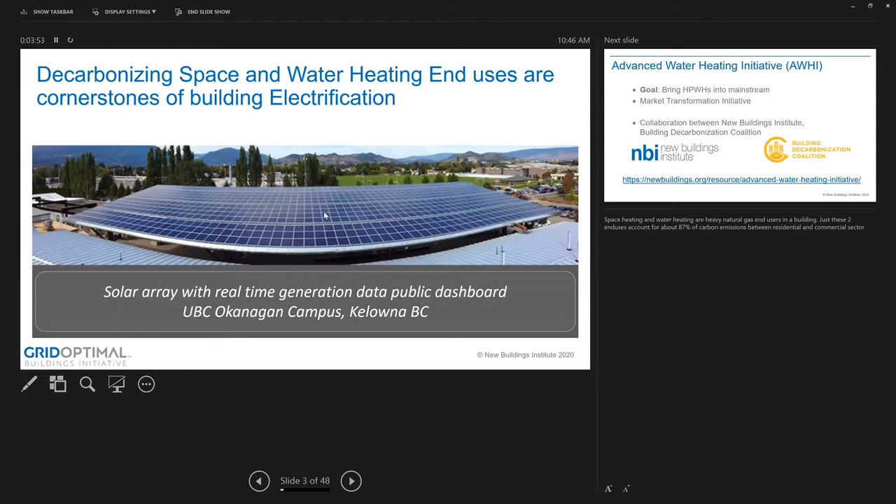Next slide, please. So typically, when you hear about decarbonization or electrification, people talk about grid side electrification and decarbonization, but space heating and water heating are heavy users of natural gas in a building. These two end uses account for 87% of carbon emissions between the residential and commercial sector, so there needs to be special attention given to these two end uses.

Next slide, please. Through the Advanced Water Heating Initiative, we are focusing on the water heating side of things. It's a regional multi-stakeholder effort to help increase production as well as adoption of heat pump water heaters. It's a collaborative market transformation effort between New Buildings Institute and Building Decarbonization Coalition.

So why heat pump water heaters, why so much focus on them? Heat pump water heaters are proven technology and have been in the market for more than decades now. Compared to conventional gas water heaters, they are 2 to 4 times more efficient, and because of that they also reduce greenhouse gas emissions as well as methane emissions. A grid connected smart water heater has great ability to reduce demand when connected to the grid, and act as thermal batteries. That's why there is this focus on heat pump water heaters under the Advanced Water Heating Initiative.

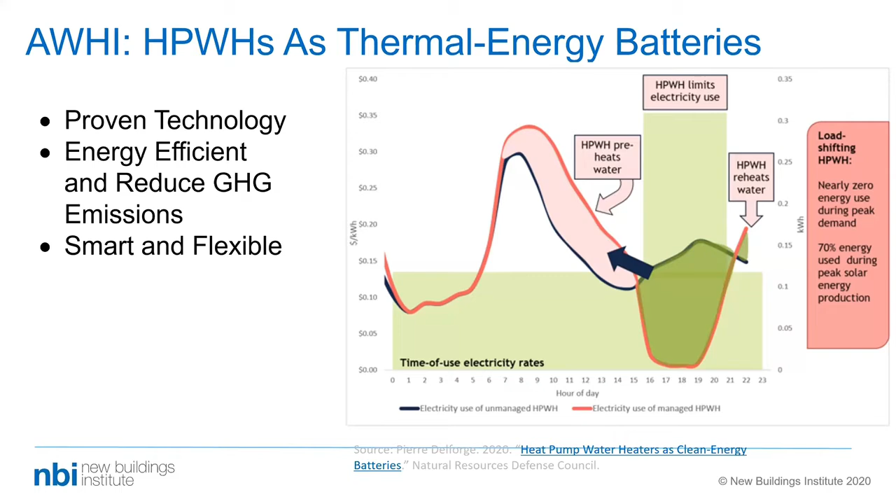Next slide, please. The funders and partners of the initiative are Bonneville Power Administration, Southern California Edison, Northwest Energy Efficiency Alliance, and SMUD.

Next. So right now in California, 93% of California's water heating stock, and 50% of Northwest water heating stock, is directly pumping fossil fuel into buildings for heating water. To give you some context, that is equivalent to 14 million water heaters in California, and millions of water heaters nationally. So this technology alone has tremendous opportunity to reduce carbon emissions.

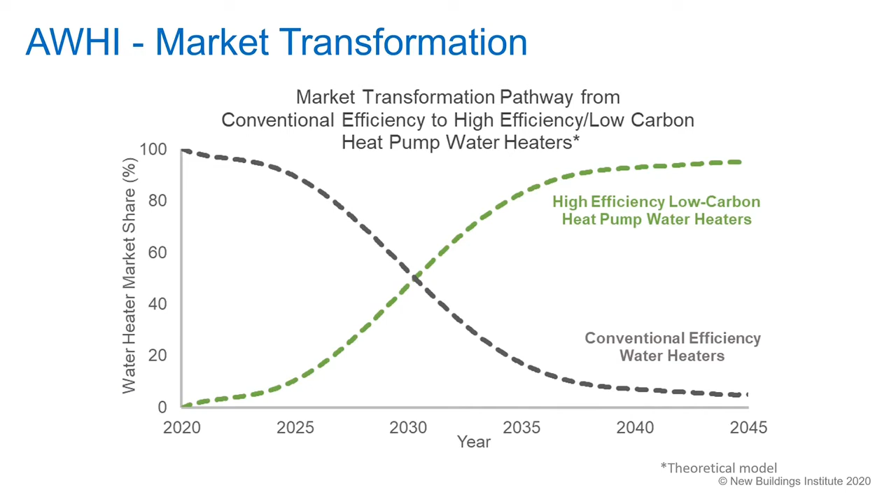So, role of the initiative. There are many efforts happening under this initiative, but I like to bin them under these three main categories: strategic planning and coordination.

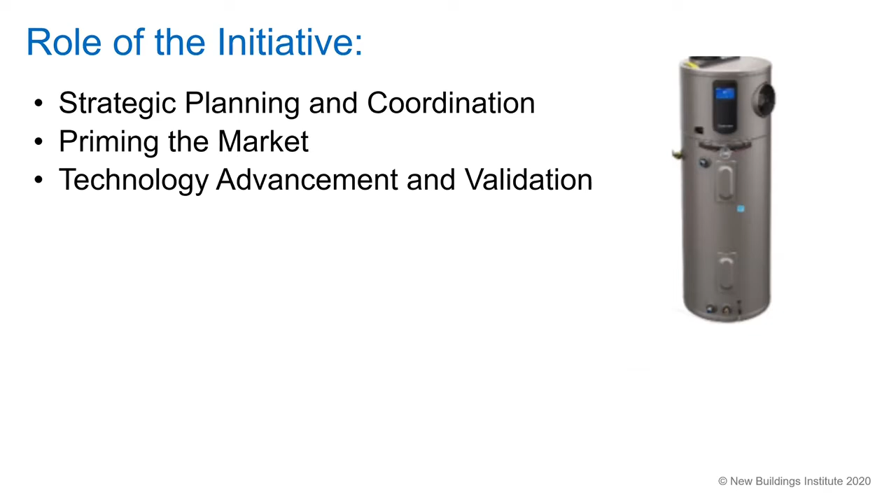Priming the market covers anything to do with market demand and confidence building activities. Technology advancement and validation means making sure the technology is advancing and available, and that supporting materials are available, like trade community resources, guidelines and checklists, and permitting guidelines. So the third bullet covers anything to do with technology advancement and validation.

So we have 4 different working groups under the initiative, along with the initiative leadership, which is focusing on planning and strategy, and we have a 13-member steering committee.

For the working groups under unitary heat pump water heaters, think of these working groups as focusing on technologies as well as market sector. This initiative is for residential as well as commercial buildings, and new construction as well as retrofits.

Under unitary, there is the 240 volt working group, led by Owen from SMUD and Jareen from Southern California Edison. Each working group, since the technology is in different phases of adoption, has unique challenges. For example, for 240 volt, the product exists in the market, and this working group is focusing on developing building demand, program and utility incentive guidelines and recommendations, and regulatory recommendations.

The next one is 120 volt, led by Jim Lutz from Hot Water Research. The product is not market ready right now. I know Craig is presenting from GE—GE has a 120 volt product currently under UL testing. Since the product is not market ready, this working group is focusing more on technology development, guidelines development, and building market demand.

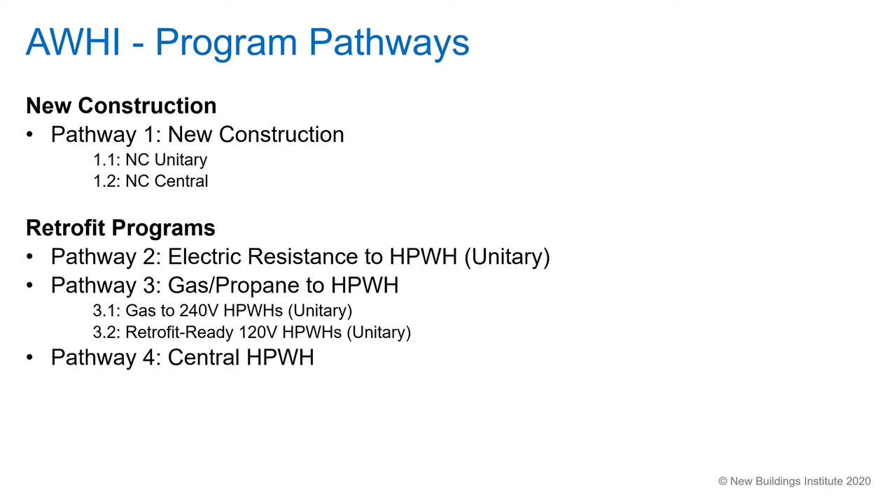Next. So key updates: this Advanced Water Heating Initiative is a collaborative effort of over 35 organizations and 50 plus active members. The key stakeholders are manufacturers, efficiency advocates, utilities, and cities.

Great news is JA13 is adopted. It's a heat pump water heater demand management standard that requires time-of-use based load shifting for non-connected units, and grid-connected load shifting.

There is great potential for this initiative to become a national initiative. We have received interest from the state of Colorado and the Midwest, and we are in fact starting a similar effort in the Midwest.

Last year there were many downstream programs—18 plus heat pump water heater focused programs in California and 80 plus programs in the Northwest—and none of them were seeing much uptake. They were all downstream programs focusing on customers. Now we see a switch from downstream to midstream programs, focusing on distributors and contractors, and with that switch we are slowly starting to see an uptake.

Just to give an example, Southern California Edison just came up with their retailer incentive program. Now they have units available for $199 at retailers like Lowe's, and most of the units were sold within 1 week. I think that's great progress.

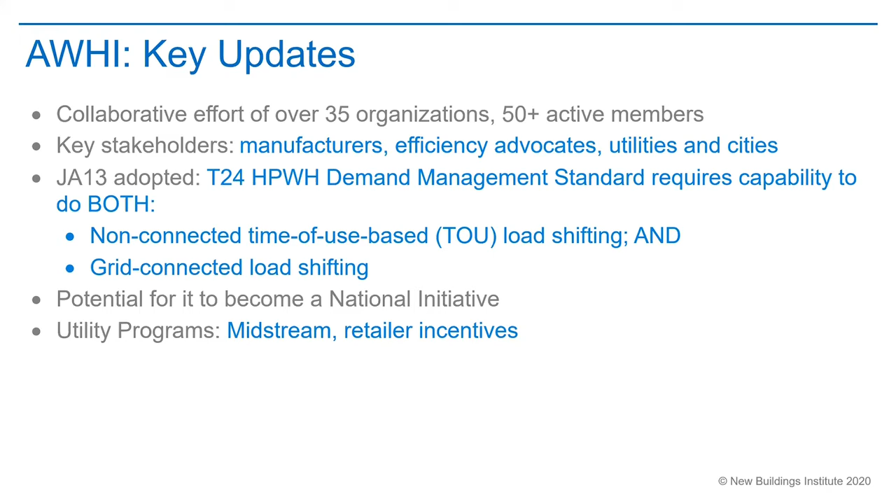Quickly on the logic model—I do not plan to go through it in detail. Basically, the logic model focuses on the barriers for technology adoption and then channels them between three main channels: market channel, programs and partnerships, and regulatory. Then there are activities and outputs to make sure to tackle the barriers. Next slide, please.

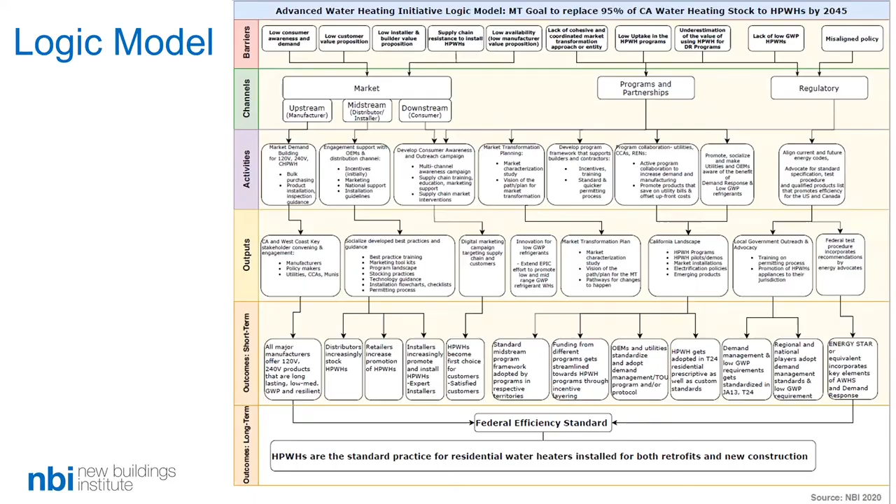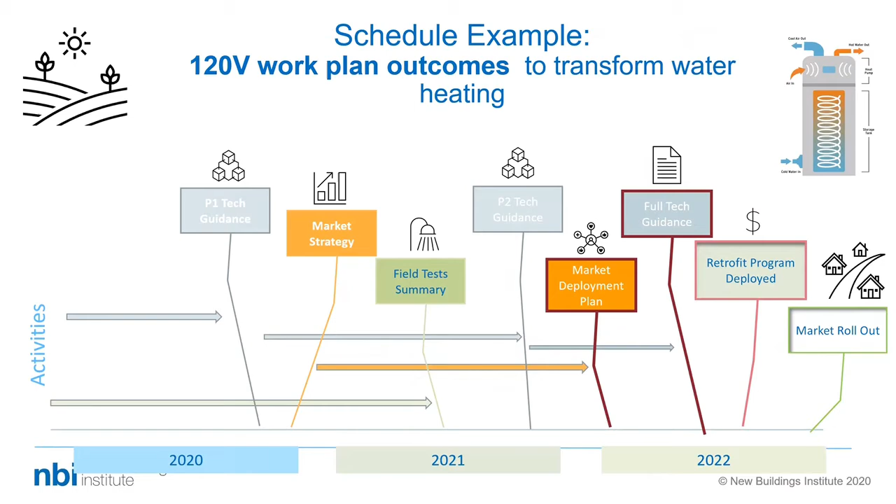For this market transformation effort to be successful, we need to know clearly what the energy, emissions, and operating cost savings are by this technology compared to its competitors like electric resistance, standard gas tank, condensing tankless, and non-condensing tankless. This is just a draft—we are starting to look into the energy and emissions.

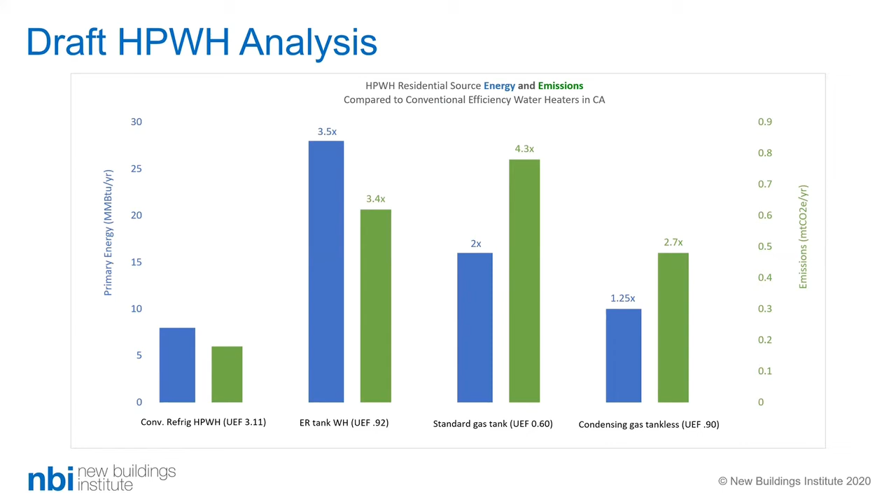One feedback I received from the steering committee was to do this over a range. So I'm working on high versus low variables, and next time we'll have a range for these.

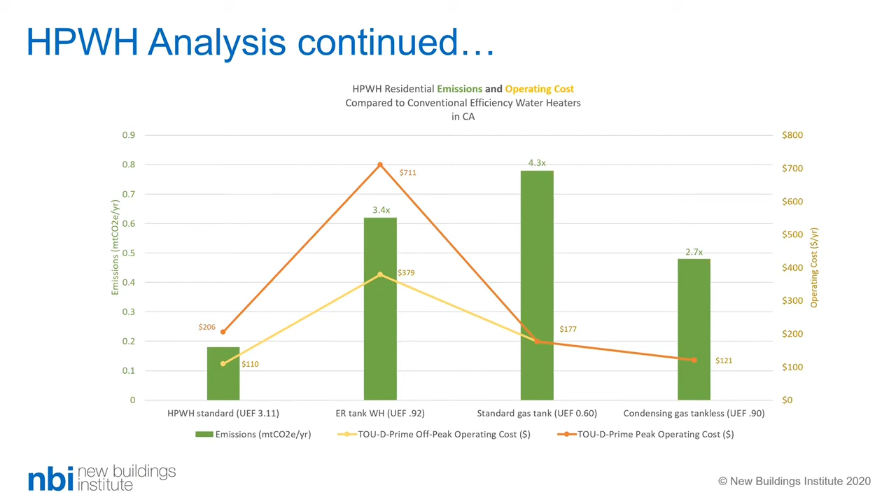We have an advanced water heating webpage, and the link is given below. There's also a blog out by Cathy Higgins, our research director, and me—feel free to read that, the link is below. So that's about the Advanced Water Heating Initiative.

The key takeaways are: heat pump water heaters are a proven technology and ready for market adoption, and there needs to be more emphasis given to market adoption and technology advancement with grid connectivity and advanced controls. Thank you.

This is Cathy—I see a few questions. Maybe it would be great to have them narrated by Amanda now, so they're right in line with Amrita's presentation. It's a long time till the next one.

There's a question here: Does the Rheem 120 volt heat pump water heater not meet the standards that Amrita was talking about? If not, why not?

Rheem isn't specifically talking about their 120 volt water heaters, and manufacturers are very silent about their new products, as you can imagine. So because they're not talking about their products, I don't know their specifications or whether they meet the standards. But I can share that they've said they're going to give me one of their 120 volt products and install it in my house with Maples Plumbing locally—I've been waiting for this to happen.

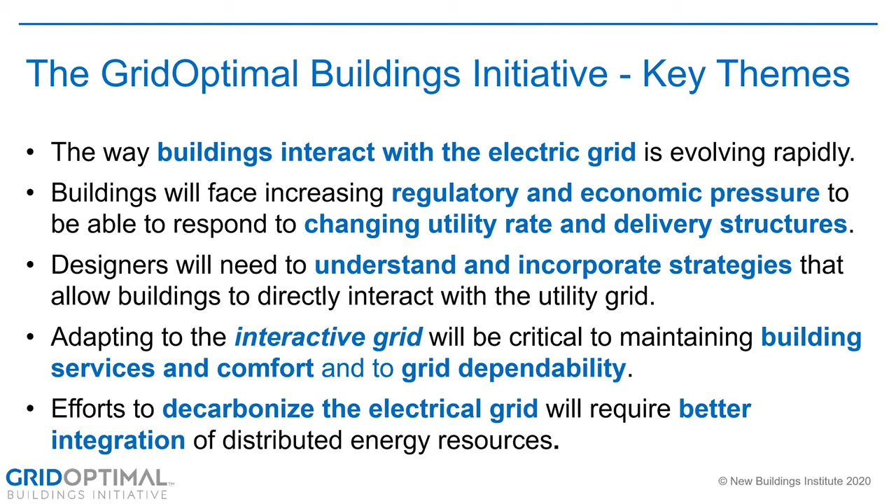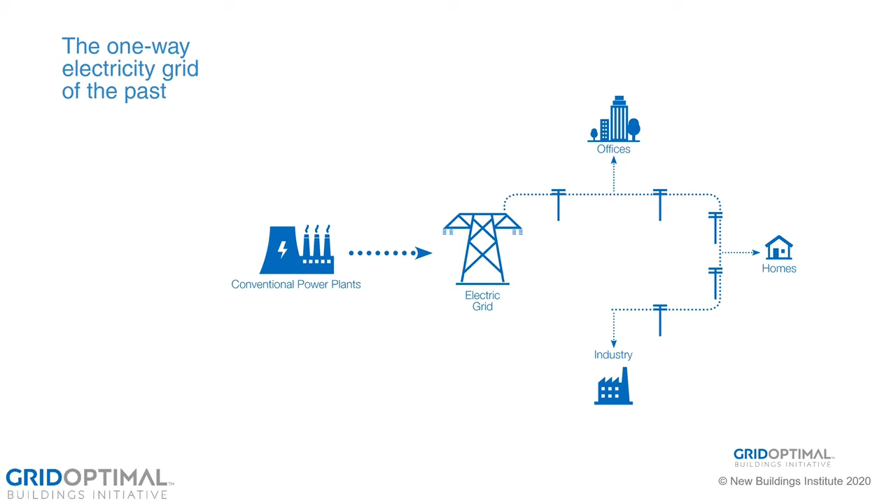I'm not going to spend a lot of time on the basics, since I know this is a pretty technically savvy audience. Very briefly, the electricity grid used to be a one-way street: big thermal central power plants put electricity out there, used by buildings, factories, offices, and homes. In the future, we're expecting to see a scenario that we're already starting to build.

We have already started building this scenario where we have an interactive grid, with two-way energy flows. There are renewable resources, both big central wind farms and utility grade solar, and we've got distributed energy resources on buildings, whether that's energy generation like solar panels or batteries. We've got smart devices, we've got EVs plugging in. It's more complicated, much more dynamic, and much more decentralized.

So the goal of the GridOptimal Buildings Initiative is to make sure that buildings are doing everything they can to support our transition to this vision.

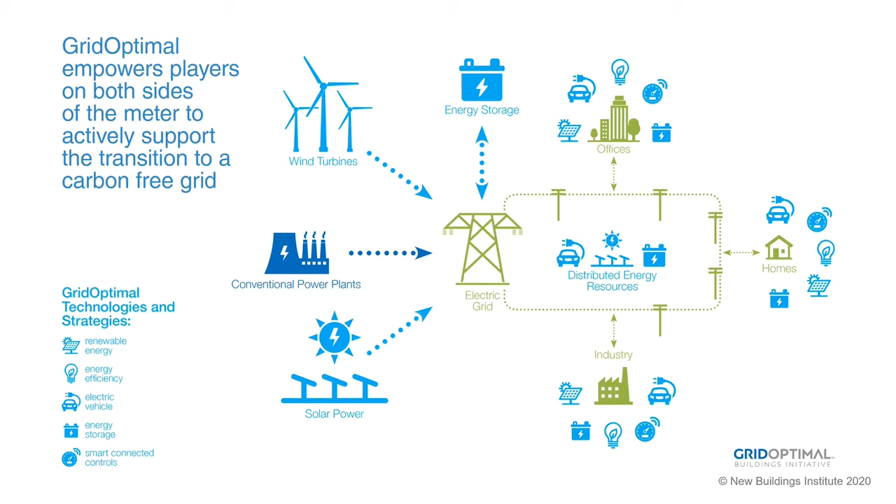One of the key drivers pushing us to think about this is that the number one way we are decarbonizing the electricity grid is by adding more wind and solar. Awesome, but those resources are variable—solar produces when the sun is shining, wind produces when the wind is blowing. Those have seasonality and daily variation.

This is driven by both supply side things like lots more wind and solar on the grid, whether distributed or central, and demand side things like higher peak demand in the summer evenings or the winter mornings. You can play this game a couple different ways, trying to minimize building carbon emissions in a time of use manner. But if we want to get to a lot of zero energy buildings, there are a couple different options you could take to get there.

This is a slide that NREL, National Renewable Energy Lab, and Rocky Mountain Institute put together a little while back, sometimes called a tale of two buildings. On the left is a zero energy building, and on the right is a zero energy building. The one on the left, however, basically got there by putting a bunch of solar panels on top, whereas the one on the right got there through a mix of deep energy efficiency, demand flexibility or load modification, where they're shifting some energy use from certain hours to others, and then a smaller amount of solar panels.

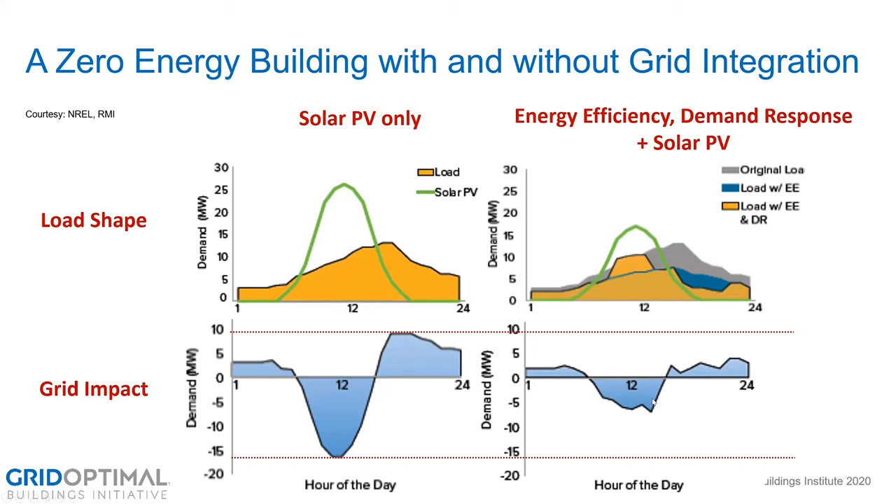So those upper two graphs with the golden load shapes, the golden areas are the building's load throughout the day. The green line is the solar PV generation. The blue part below that is the net load that goes through the meter, so that's what the utility sees. You can imagine that if you have lots of these zero energy buildings, which is something we want to have, it is easier to make the grid work for all these buildings and to serve all these buildings if more of the buildings look like the one on the right than the one on the left.

There are a couple different ways you can get there from here in terms of building modifications to change the load shape or the demand profile of a building - that's the kilowatts passing through the meter compared to the time, kilowatts over hours. Just plain old energy efficiency continues to be critical. It's been foundational for a long time, and it's still foundational. If you lower your energy demand across all hours of the day and the year, that lowers it at the peak too.

That's helpful. You can also shed load. Traditional demand response programs more or less do this, right? Turn off your compressor for 15 minutes or turn down your lights, whatever the case may be. That's usually used in traditional DR programs. You send out a call, some amount of the people who get the call do the thing, and some load is shed on the system. It's usually pretty short-lived, right? 15 minutes, 1 hour, sometimes up to 3 or 4 hours.

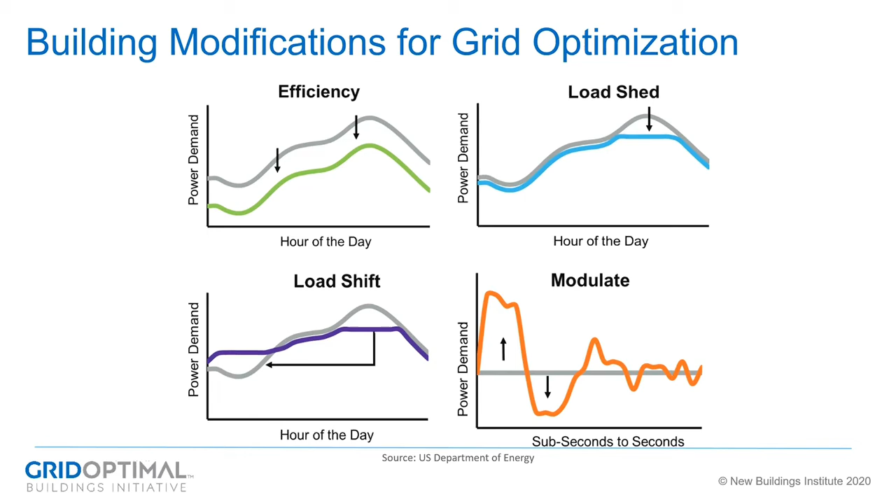Load shift is when you take some load and move it somewhere else. You could do this by pre-cooling or preheating, for example. Batteries are good at doing this, thermal energy storage. And then the last one, modulate - this is very short-term load modifications like frequency response and other grid ancillary services. The DOE likes to think of these things. This is a graphic from the US DOE, and they call this shed, shift, shape, and shimmy. It's another way to think of these.

You can get to doing that, those are outcomes. What do you actually do in a building to get there is obviously a pretty critical question. I like to think of there being a couple different pathways to do that. One, there's permanent efficiency - add more insulation, say, reduce your building energy loads throughout the whole year. That's helpful for peak, that's helpful for high carbon hours. Great. Peak shifting - design a building so that its time of use is shifted over time. Maybe you put on some west-facing shading so that there's less afternoon solar heat gain.

And on a permanent basis, that building is just going to have a lower demand during those hot summer afternoons, which is helpful during the peaks. You could do a more dynamic approach, whereas the west-facing shading is pretty passive - you stick it there, it's there forever. You could dynamically put in maybe phase change materials or more thermal mass so that you can pre-cool the building and coast through that evening summer peak. And then you could be dispatchable and have two-way communication with the grid - maybe you use a battery, maybe you do some other cool stuff with your building controls, HVAC, lighting, other controls.

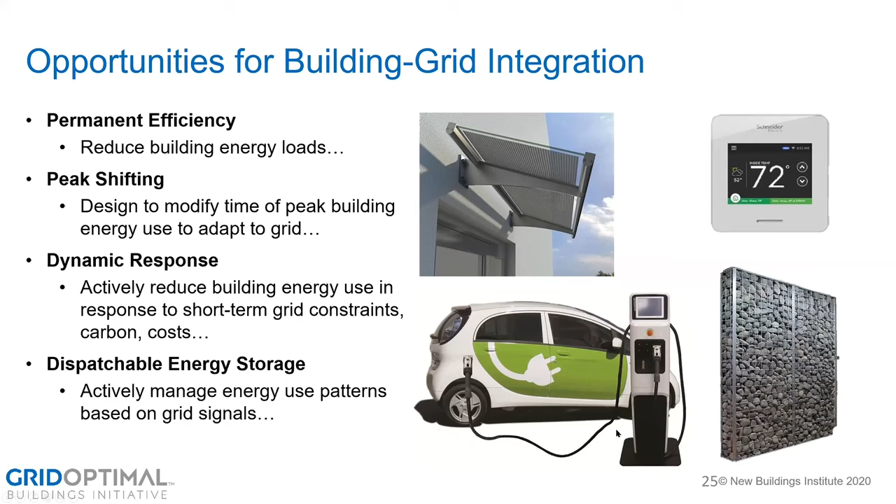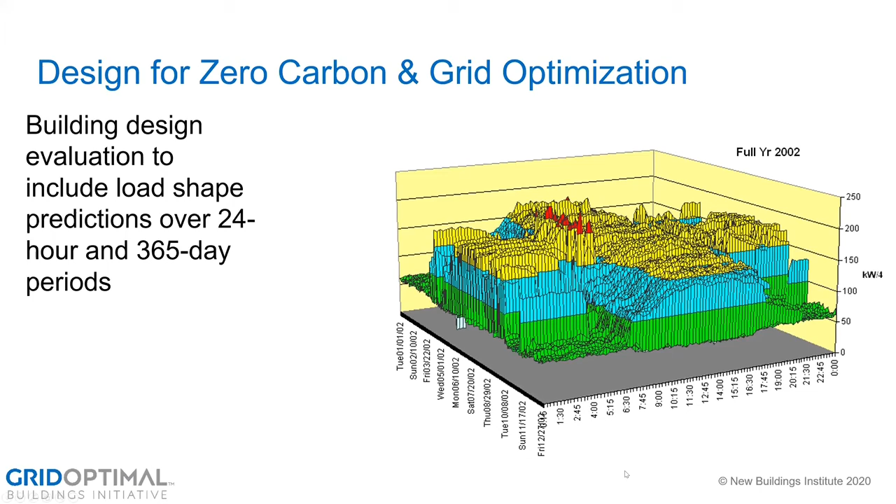What we're trying to charge up with GridOptimal here is getting the design industry, the buildings industry, to think about these issues during design. So instead of just saying, okay, baseline used had an EUI of 55 and our design case has an EUI of 35, great - I mean, that's good, but also it's good to think about the load shape throughout the year, over the day and across the whole year. So we did some interesting modeling where we looked at how building design measures can change the load shape. This is out of some work that we did in collaboration with a group called Redcar Analytics.

Here's a baseline code compliant new construction building in San Francisco. You can see the loads broken out into these various categories: cooling, a couple other smaller ones, lighting, plugs, etc.

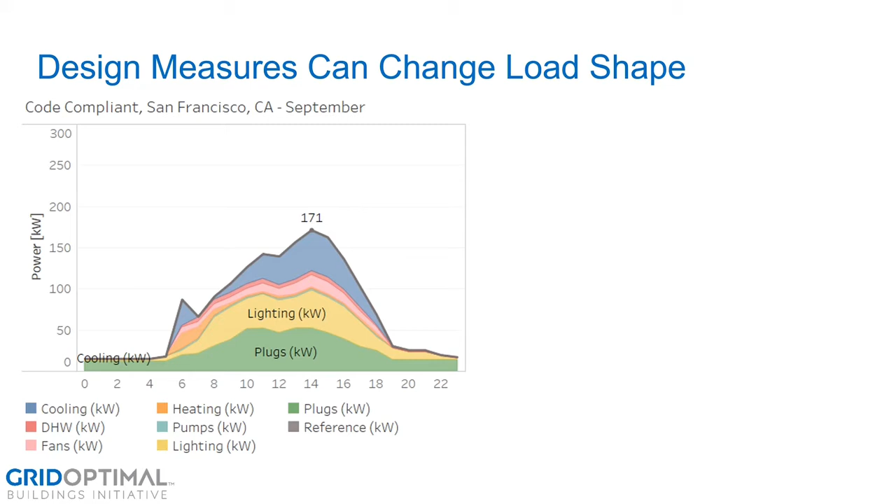Summer day in September. We came up with a bunch of strategies, things you could possibly do to adjust that load shape. Things like a little bit wider thermostat comfort set points, morning preheating in the winter, afternoon pre-cooling in the summer, adding in some thermal mass, shading, all kinds of cool stuff.

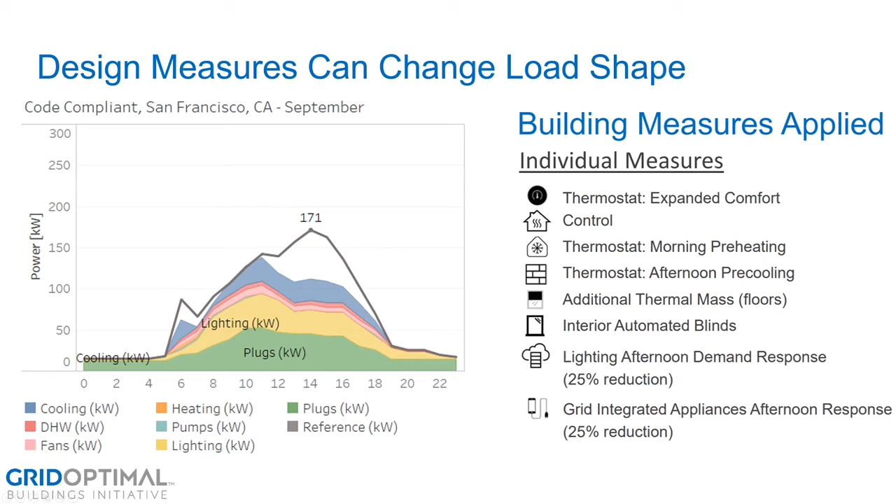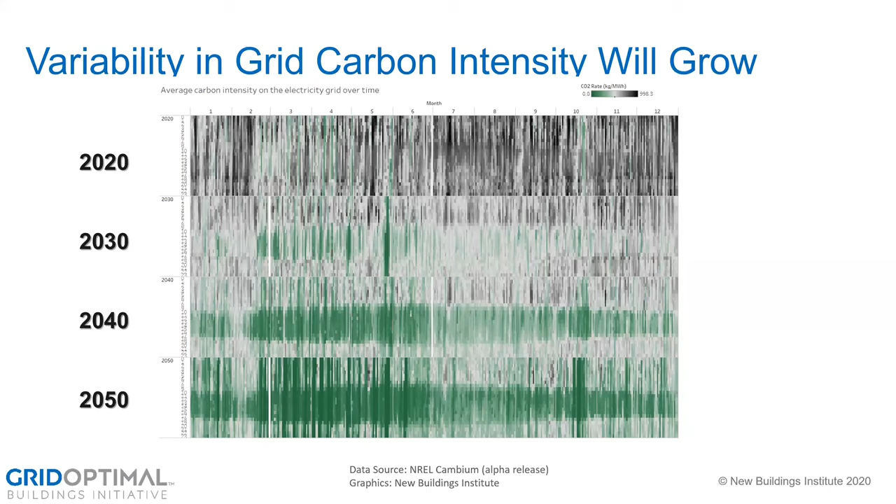Well, so that's what this one takes into account, the efficiency at the building. This is building times grid here. Okay, so yes, it got much greener.

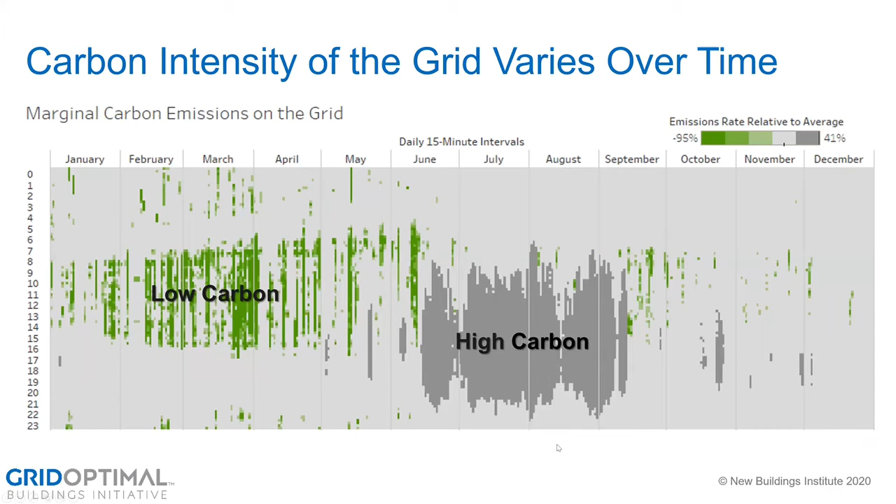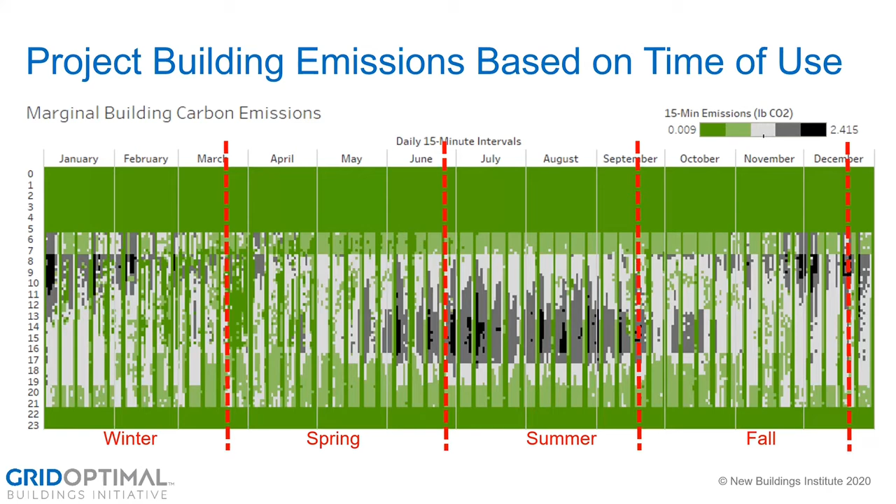The color scale on this one is a little different from the California one. These are just illustrative, but bringing the heat pump into play is critical for actually reducing emissions significantly. The story of electrification, as Kathy is going to tell us in a bit, is in great measure the story of heat pumps. No, it's a great point, and it's critical.

So just a quick note on GridOptimal before I pass it over to Kathy to bring it home. We're in the third year out of three on GridOptimal. We've developed metrics that define how buildings interact with the grid and put a number on the quality of building-grid interactions. There's a blog linked up there, and we got a white paper out at Summer Study 2020 describing them in detail, documenting the methodology. We've done several pilot projects, and just last week we got approval from the LEED Energy and Atmosphere Technical Advisory Group for our pilot credit based on these metrics. Once we jump through a few more hoops, there should be 3 LEED points available for grid optimization based on the metrics we've developed over the last couple of years.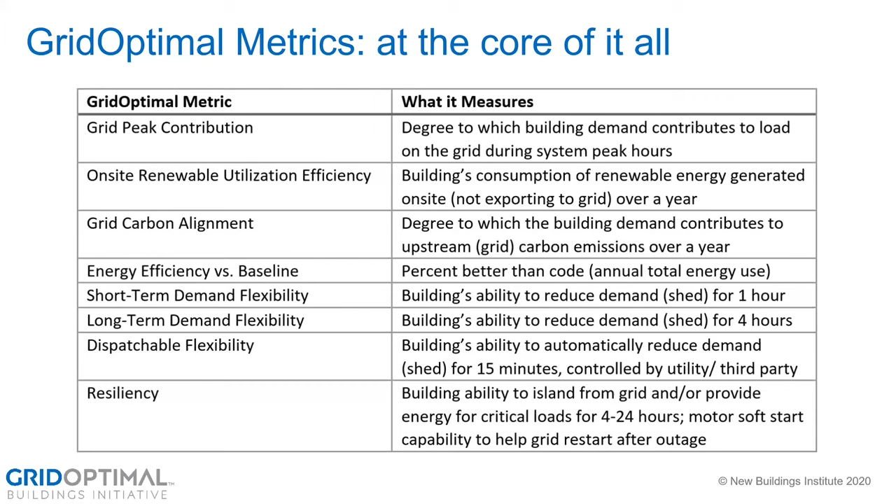Similarly for grid carbon, are you adding load during high carbon hours, or are you optimizing for carbon? Then some of the ones toward the bottom, like the demand flexibility metrics and resiliency, have more to do with what you can do at the building - what kind of capabilities you have, whether you have the ability to trim load when it might be helpful, that kind of thing.

We are still accepting pilot projects and would be interested in talking more if folks would like to.

Maybe a brief moment for a couple of clarifying questions, but I don't want to eat into Kathy's time too much. You have about 10 minutes for Kathy, and I want to respect her time too, so maybe take questions - there are 4 or 5 good ones in the chat. Could you just type answers in there and transition? Oh, that's a great idea. I'm targeting less than 10 minutes, so we'll have a moment there too. Good idea, Sean. No, we like Sean's facilitation. Yeah, thanks, Sean, take care.

Okay, I'm going to grab the screen from Alexi because I'm going to navigate my own slides, as is my style, as my audio. Sean, is it good? Yeah, it's perfect, you're doing great. Great, well, you like my opening picture - can you see it? You look lovely. It's your photo on the right that I'm hoping you'll enjoy. Oh yeah, thank you - Emily Higbee took that photo, one of our staff, she's both an engineer and an artist. I saw her on your website.

Emily, well, thank you for having NBI join you in this great effort of all of ours professionally to improve the built environment towards decarbonization. I'm going to move through what Sean said was a lesson-focused approach and cover just 3 topics regarding a project I'm leading called Building Electrification Technology Roadmap - BETR, great acronym, love using it - on behalf of California. I'm hoping that in 8 or so minutes you'll understand why BETTER matters, what technologies are ready today, and what their energy and emission savings are. If you can get that from 8 minutes, that's ahead of the average person for sure.

And it isn't about some governmental or bureaucratic target that's really just a wish in the sky. This is about really changing our built environment for the next generations. And this is the logo I've adopted: BETR now than later. So we really have to not wait.

We are today having the implications of carbon that was released in the 1990s and the turn of the century. So what we do today is affecting that period. The carbon that we can reduce, although you feel it's a slow movement, it will make a change in the future atmosphere and environment.

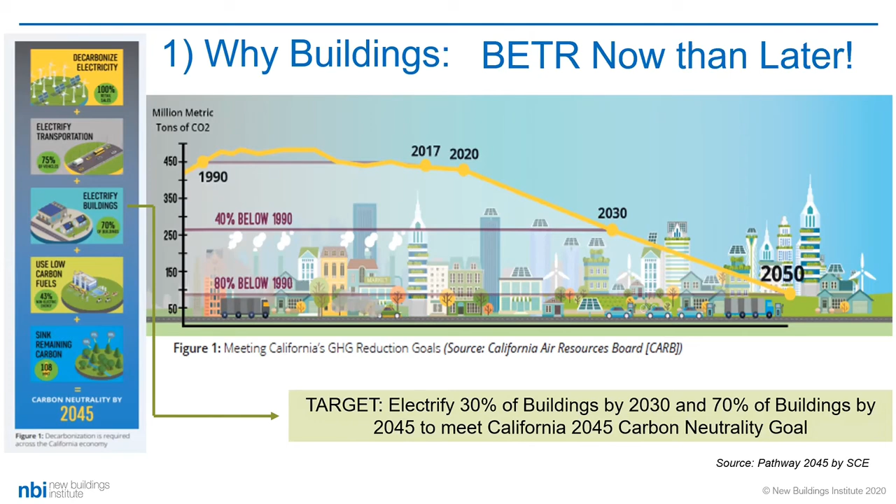So you see on the left here that buildings themselves within the California goal are 70% need in terms of how many buildings need to be electrified. And that means that 30% of buildings need to get electrified by 2030, and 70% of all the buildings need to be electric if the decarbonization goals in aggregate are to be met.

So in terms of the emissions impact, again, the buildings are about a quarter. Everybody thinks it's all transportation, but we're in the built environment—it's a significant player, and efficiency remains a big part of that.

Also, when we talk about the emissions impact of buildings, most of you smart people on the phone know that includes the materials. Someone mentioned embodied energy, but really the measurement of emissions has to do with the construction and the production of the materials. So even when you look only at the framework of the building, working at operational energy reduction, which we are with building electrification, that's still 10% of the pie on the right.

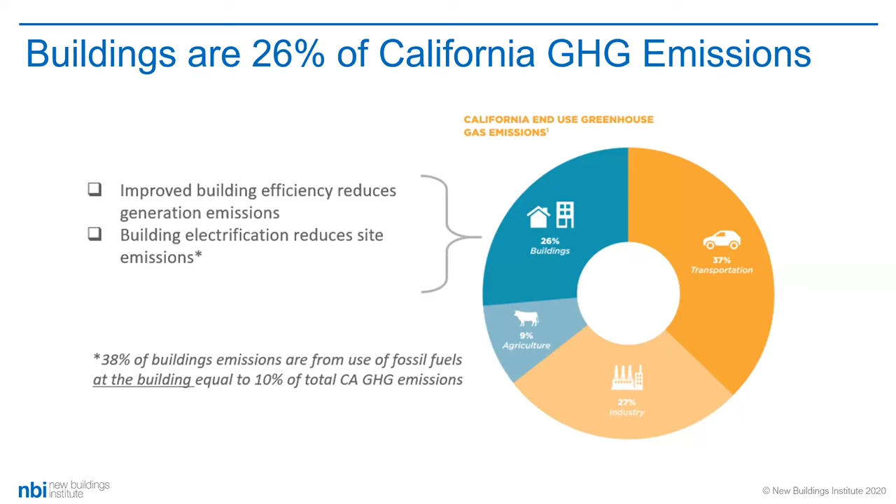So buildings as a whole, from production through to operation, what we do at the building is a huge part of reducing emissions. I think a lot of people are familiar with the fact that gas is a major part of the use. So I liked that Sean opened and Alexi was next, because we're talking about decarbonizing the built environment, and a green grid is not enough.

So you saw in Alexi's GridOptimal, he's talking about changing the grid profile. Well, we can PV our way all the way to 100% clean generation, which has those problems of the time of use, but it's not going to change the fact that 70% of the residential energy use is met by natural gas. So unless we address emissions in parallel with the grid and the building, we're not solving the problem.

And I just want you to be aware that it's so regional. If you're talking about residential gas and electric in Sacramento, water heating is 28% of the emissions, and space heating is 65%. But you get down to LA, water heating is over half, and space heating is a smaller proportion. So your location matters in terms of the prioritization of technologies.

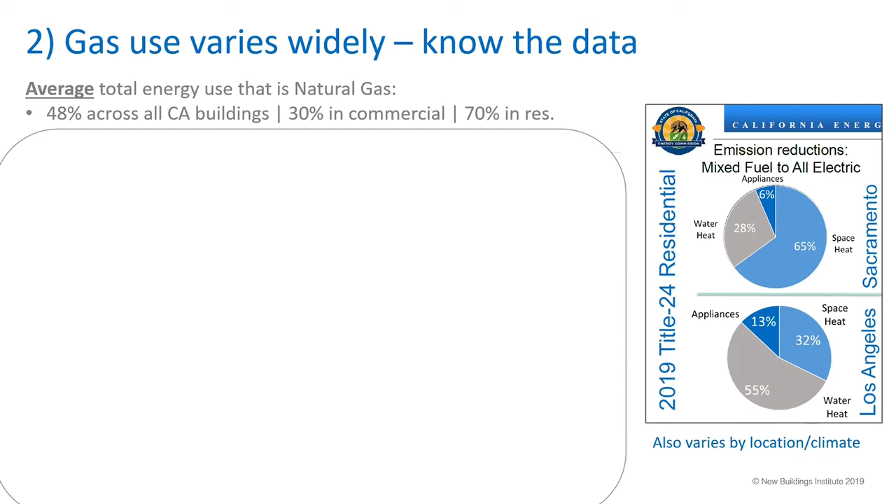But the best thinking is just to think to get it all electric. But I think it's important to know the data. I'm just a little more data than as beautiful visual as Sean is, but here's some data also to make that point.

You may say, oh look, 30% of commercial buildings use is natural gas—we've got to go after 30%. Well, in restaurants it's 60%. In retail it's only 8%. And that's just a ratio of the building type.

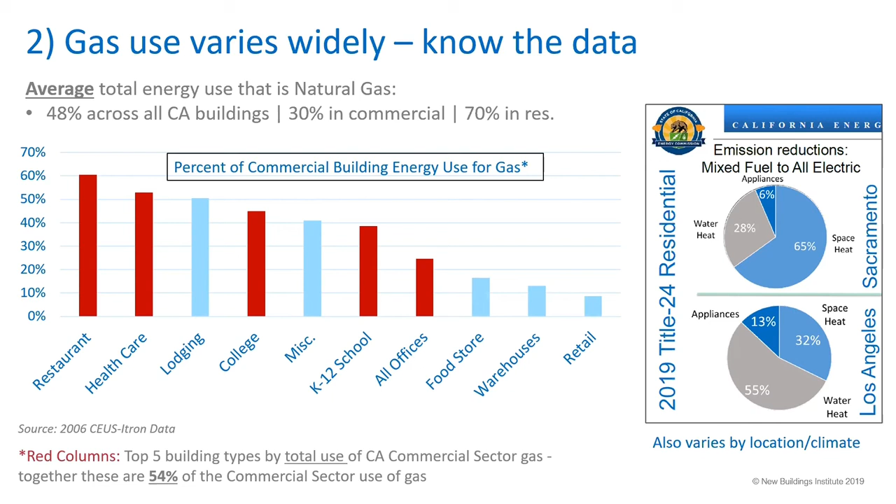But if you were to say, over the state's total use by building volume and square feet, the red bars would be your first priority. So make sure that you're thinking about this dynamically and about where the big targets are, because we can make larger change quicker at a couple of key sectors first.

So what is this 'BETR' that I'm working on supposed to do anyway? It's supposed to tell us what the technical status of the products are, where are they on the road to adoption, and what can we as efficiency professionals do to overcome the barriers to adoption. That's it. The target audience is efficiency programs and governments. It doesn't speak to all parties, but it will be informative to other people like design firms and manufacturers.

And in order to develop BETR, we had to get into a thing we call the matrix—Alexi's favorite image here. That matrix is where we looked at 4 end uses as seen on the right, 38 total technologies. Only those technologies—let me clarify, there are an enormous number of electric technologies—these are only the priority technologies that displace incumbent gas technologies. So that was the screening criterion.

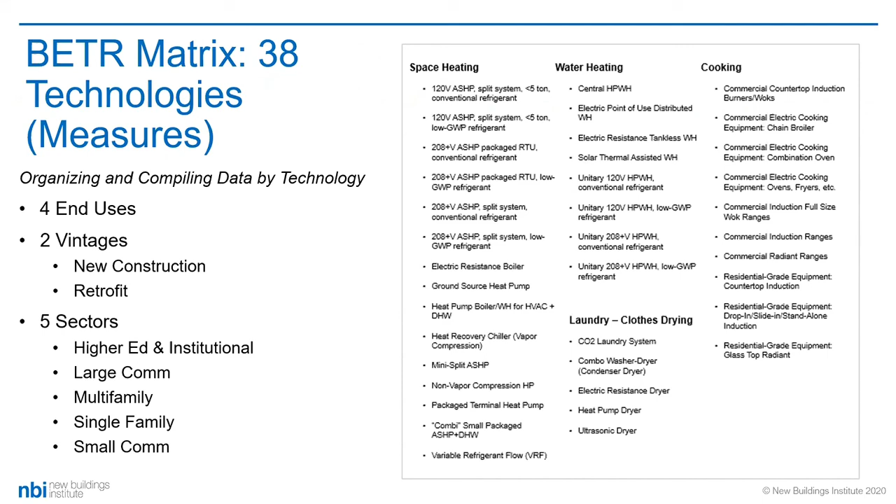We have 2 vintages. We were comprehensive in new construction, retrofit, and 5 sectors. And we measured them across 5 parameters: their readiness, their availability, are they easy or not when put into the field—think of those as site barriers. And we want all the scores.

I've made them light gray because I don't want you to have to bother looking at those, but we want the score 3 to always be better, back to that acronym. So a high score is good and a low score is less available or less ready.

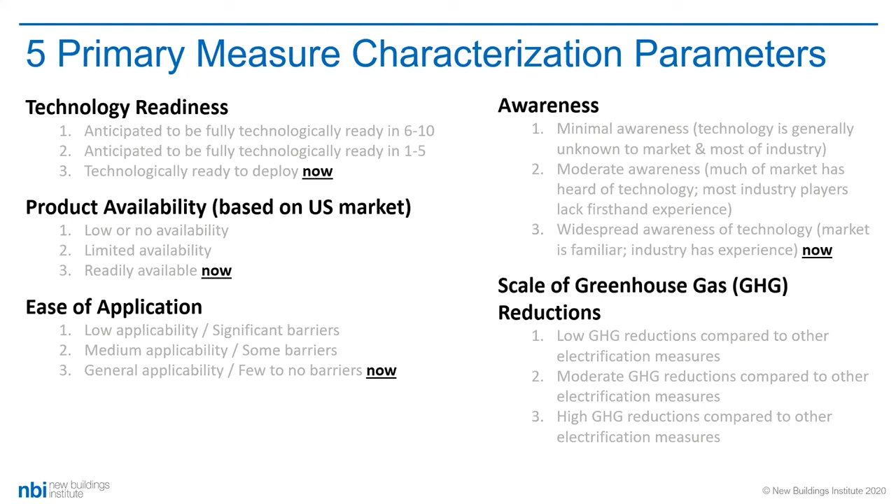Awareness: how aware is the market, and how impactful are they on greenhouse gas emission reductions? This would have to be compared to other comparable electric technologies that would displace gas, because every single one of those is significant compared to using a gas technology at the site level. The emissions profiles of gas are such that replacing it even with an electric resistance water tank, which is not good efficiency-wise or operationally, still has great greenhouse gas reductions. So we have to look across a number of parameters, but the emission reductions are compared to other technologies.

I'm going to pause on this for a second before interpreting it. What we've done with those scores, which come out of that matrix in a whole bunch of iterative questions and queries, is a really fun tool for us geeks.

But we had to roll it up in a way that was a little more intuitive to look at. So across the 4 end uses here - I don't have laundry showing, which Sean gave us some input on in our laundry section - we have these 5 parameters, the matrix scores, and some Harvey balls telling us if they scored high, medium, or low.

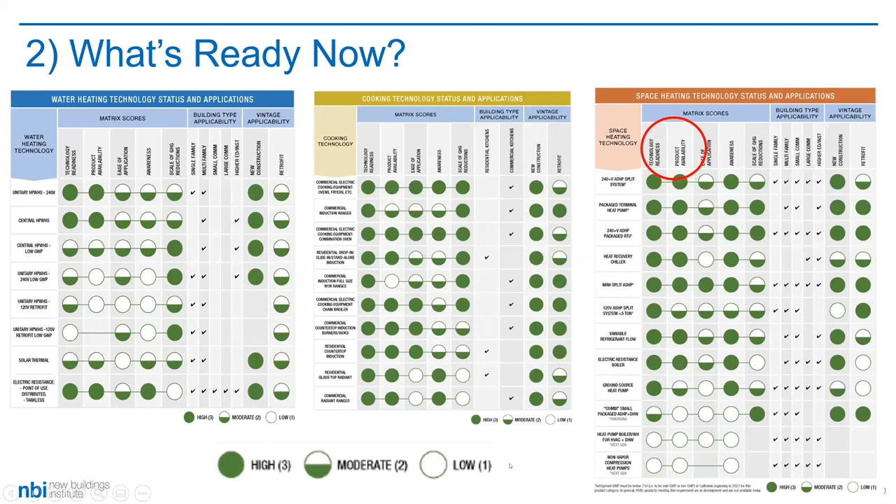So the second learning for you today is what's ready now. It's these two items on the left in this matrix for space heating - readiness and product availability - that tell you first, can I go get it? And is it technically prepared for installation?

Here's a quick glance at a cut sheet, if you will, on single family homes and low-rise multifamily homes, where in the analysis we take a baseline of gas baseline technologies, step up to better technologies, and target the best technologies.

I'll add here that I might have to change heat pump dryer to condenser combo, because that's really a combination of what's the best that's available and most likely to be adopted because of its price point. There's the best in terms of the best equipment you can use, and the combi system that Sean talked about really is the most attractive.

Because of that, I'm going to put X's over glass radiant, for example. Even though incrementally it's a step up in emissions reductions and toward all electric and affordability, it's a good choice - we as efficiency people have learned our lessons, I hope, from some of the past technologies we've promoted that just aren't operationally great. Early CFLs, for example, with ballast problems, humming, and early burnout.

We want to go straight to induction. We've got to not hamper our own progress by introducing technologies that the occupant or user is going to be dissatisfied with. So let's keep an eye on the big picture and the higher opportunity.

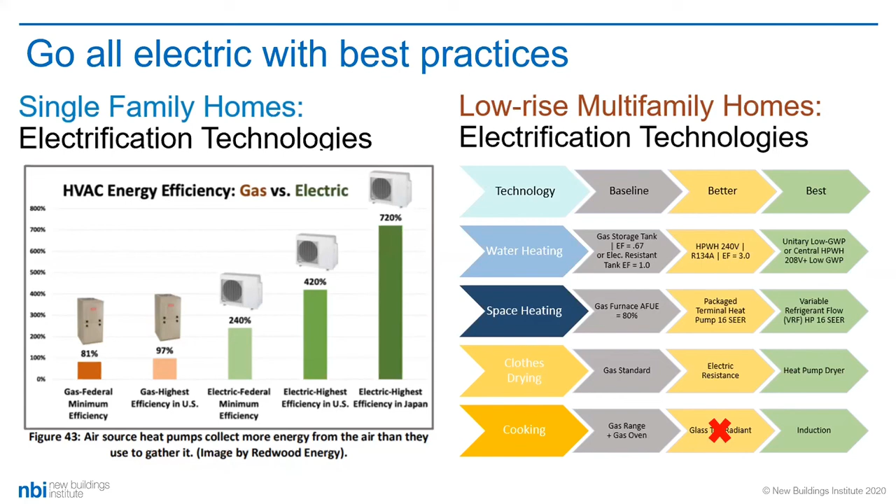Energy reduction combines with reduced emissions to get emission reduction at the grid - if your electricity is made by combined combustion turbines, gas-powered generation - and then emissions reduction at the site. We've got a double win with heat pumps.

Last item of learning: what are the energy and emission savings? What do we need to have compelling data about in order to make the case? Here's a summary of 4 climate zones, cities in California, the single family model with the medium efficiency you saw, and the single family with the green, far-right efficiency. I'll just draw your eye to the fact that these are all over 60% savings at each climate zone.

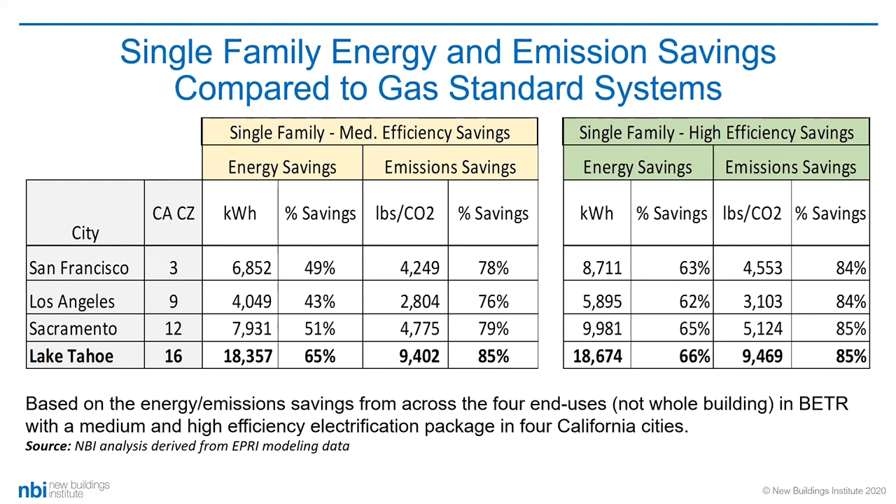And over 80% emission reductions. These are just amazing and compelling amounts that will help us have the catalyst information to help change the market.

So as a closing, I'll just remind you, a green grid is not enough - buildings have to be combustion free. There are lots of great resources; there's no shortage of homes and commercial buildings in our California resources that are all electric already, including developments. Here's a shot of my home city. We've got to work at our city levels and continue to advance the REACH codes and decarbonization policies.

And we've got to work downstream with owners, decision makers, and design teams, as well as with the midstream supply chain. A 3-pronged approach: all buildings, all electric.